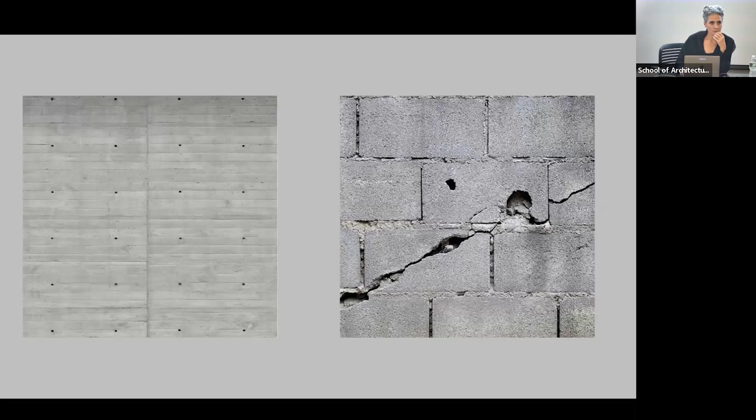Before I go into projects of our own at KPF, I want to bring in this discovery we made maybe two years ago on a trip to Japan. This is the work of Hiroshi Sugimoto—the Enoura Observatory, an absolutely gorgeous place on a cliff facing the water. It's a whole series of interventions within the landscape, some gallery spaces, some artifacts that seem to really toggle between the very abstract, elemental, universal, and the very culturally specific elements that he has positioned there in the landscape and in some of the semi-enclosed spaces.

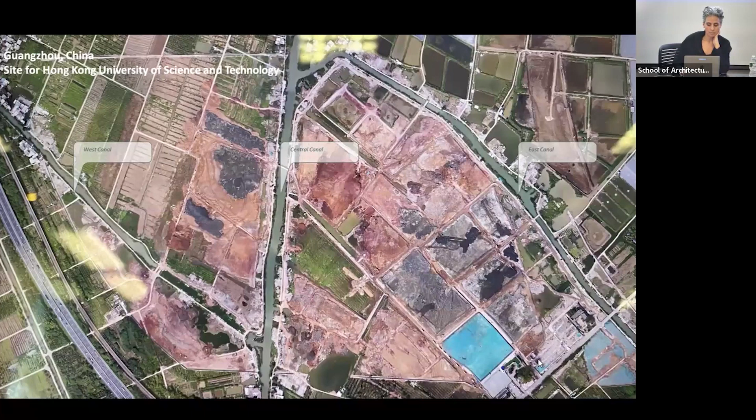So this is a project in Guangzhou, China for Hong Kong University of Science and Technology. This is how the site was prior to our master plan and our work there - mostly agricultural, with a canal that traverses through it. There was quite a rational master plan developed by my partners at KPF. I wasn't super involved in the master plan itself, but then in buildings within that.

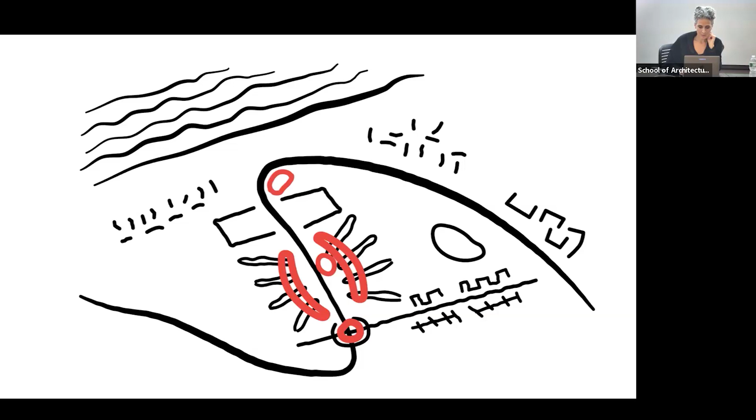The master plan had to do with, say, the machine in the park - a very rational organization of these lab buildings that sit within a campus, creating a whole campus. There's a residential component, a series of buildings on this side, and on the opposite side the canal going through it, with a few key buildings that anchor the beginning and end of this campus. This campus was designed, master planned, and built over 3.5, 4 years, which is absolutely insane.

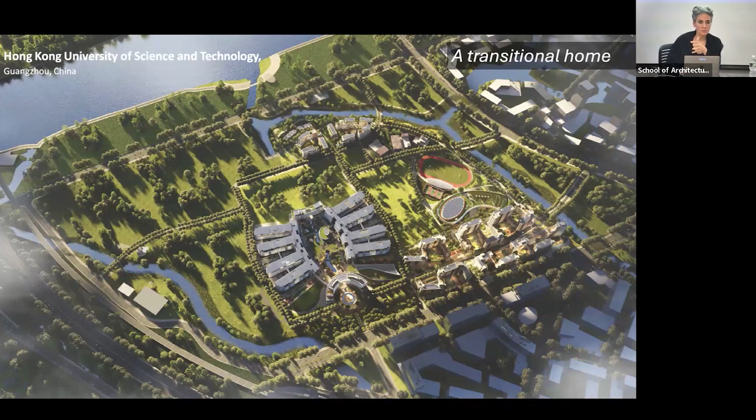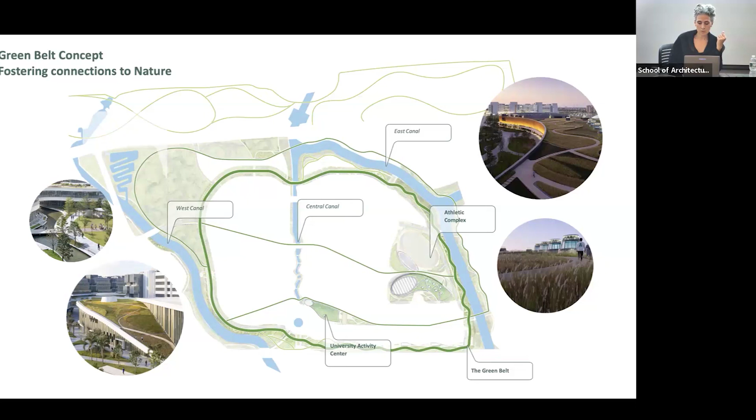It happened through COVID. I will talk only about 2 of those buildings that I had a hand in. As a counterpart to the more rational planning of the lab buildings, there was this idea of a green belt - connecting to nature, almost like an antidote to being in the lab and focusing in a rational, intense way for hours and hours. So there are a couple of buildings that are the activity center, developed as a landscape building of sorts, and the athletic complex - they connect through, and I'll talk about those mostly, as well as this administration building, which is the gateway central piece that you arrive through.

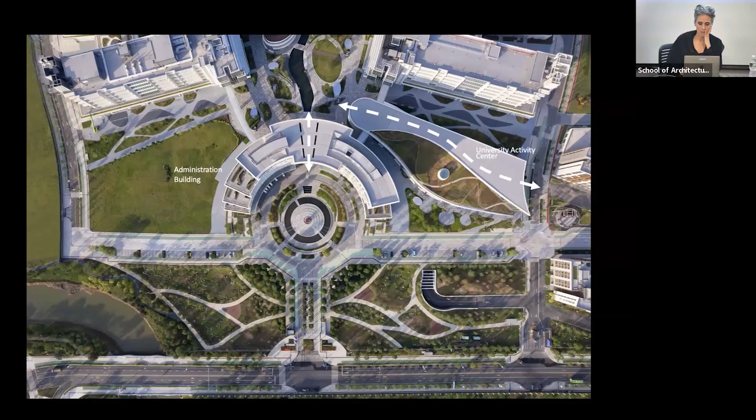Their new campus in mainland China was supposed to connect back to the original campus, keeping the symbolism, this arrival plaza, making sure the identity of the campus was translated, not replicated. In other words, what they were trying to do in China was create a campus that felt more open, more dynamic, more porous, and that translated into their pedagogy of teaching and the way they structured the curriculum as well.

Our way of thinking about it was exactly that: we'll keep this semicircular notion, but create a very dynamic form that is asymmetric, and through this giant gateway create a lot of porosity inside and out, as well as how it relates back to the rest of the campus.

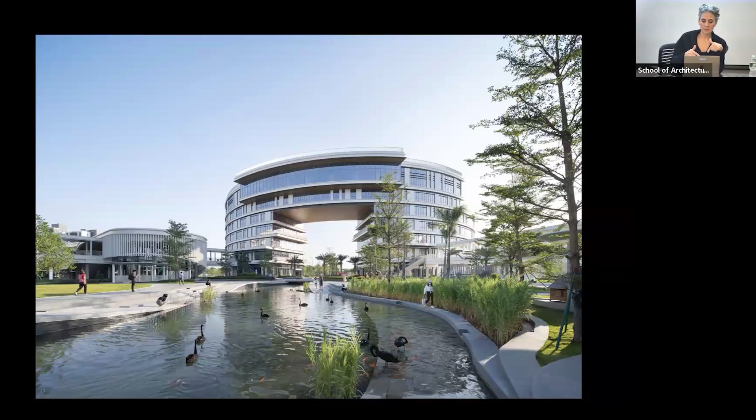There you see the integration of nature through it, that canal that comes through, and the notion of both coherence but also the campus itself being a series of almost meandering spaces of, you might say, fascination, where you find yourself through this constructed nature, constructed series of buildings, that avoid any kind of axial, completely open vistas through. So it kind of toggles between this coherence and fascination, in a way that unfolds as you go through the campus.

A series of green spaces and terraces cut through. And then one element that is part of a narrative that we really latched onto was the bamboo shoot, because the symbolism behind bamboo is that it speaks of growth and progress as a narrative and as a symbol in most of the region, in various countries of the region, relating to the bamboo shoot in that way. This was meant to be a place that drew from countries all around, including various parts of China, in terms of its student body.

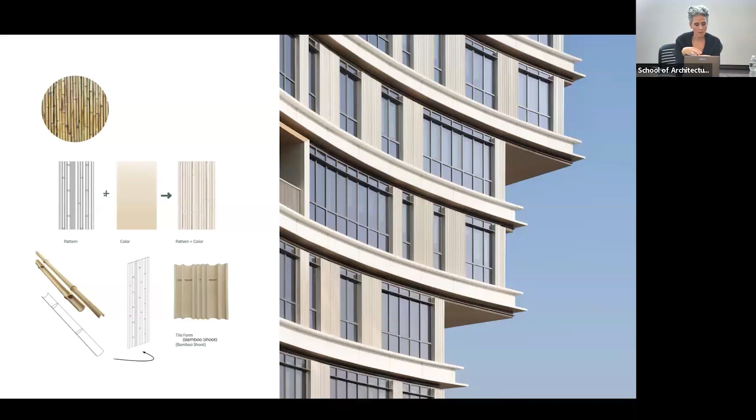Here's how we tried to look at the texture and the fluting of the bamboo shoot and create this patterning in the facade.

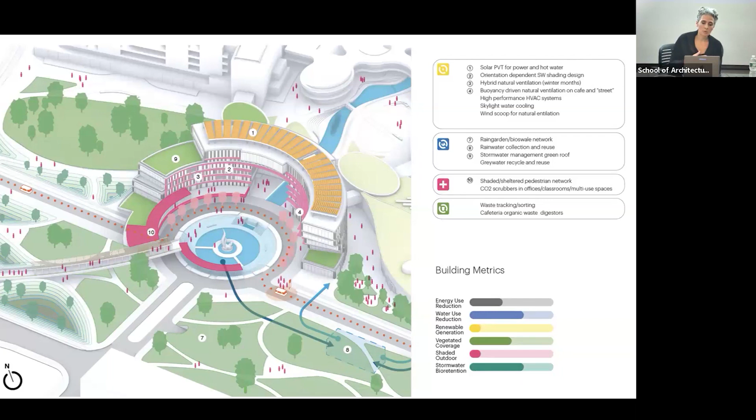And then in terms of what it does from a sustainability point of view, we're able to tap into what is called the living lab here for the whole campus, where all the buildings are connected to a circuit where their performance can be measured in real time. There is campus brain, a space where all that information is collected. So whether it's renewables, hybrid ventilation, or water management, this is that whole living lab concept.

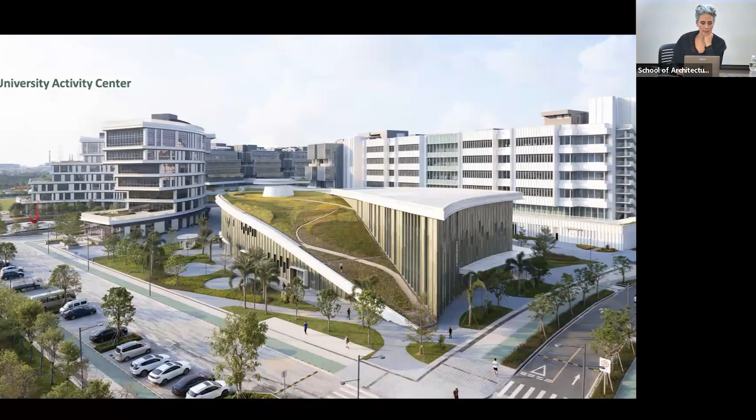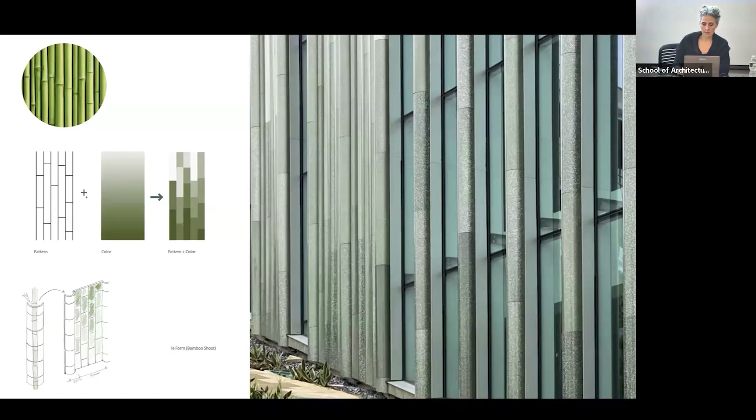And then the second building is the Student Center, a very landscape-oriented building that sits right behind it. Again here, it's a landscape building, and the facade borrows from this texture of the bamboo shoot, creating something quite unique on the campus, perhaps a little less formal than some of the other buildings.

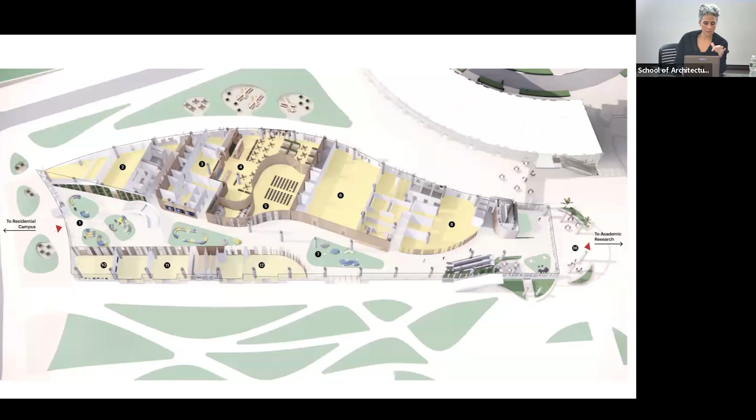In terms of its planning, it pulls people through, creating this interior street that is very much about this notion of fascination and discovery throughout. It connects the residential areas with the campus research areas on the opposite end, in this kind of meandering path on two levels.

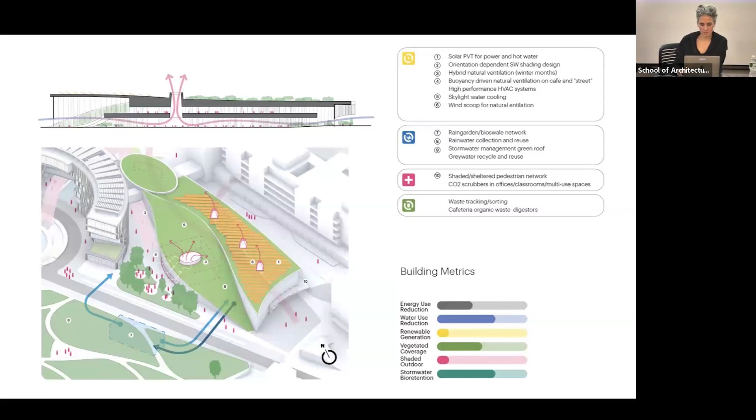This is just as the building is starting to get inhabited, so we don't have many images of it fully furnished. And again, in terms of its renewables and hybrid ventilation, it's something we really worked very hard to execute, and hopefully it'll bear fruit.

Jumping to very, very different contexts: the idea of belonging in HKUST in the project I showed earlier is more about belonging, but in a time-constrained manner. As students come through, they're there for 4 or 5 years. The place and the memories of the place that hold them together are very important to them. Everybody went to college, you're still here. You're going to remember Cooper decades from now, and you're going to remember certain spaces and moments within it as being like landmarks in your development. So that's very important for a campus.

I think understanding that the student body is passing through, and that they have this moment in their life where they come together, and their memories and relationships are intrinsically embedded with the place where they occurred.

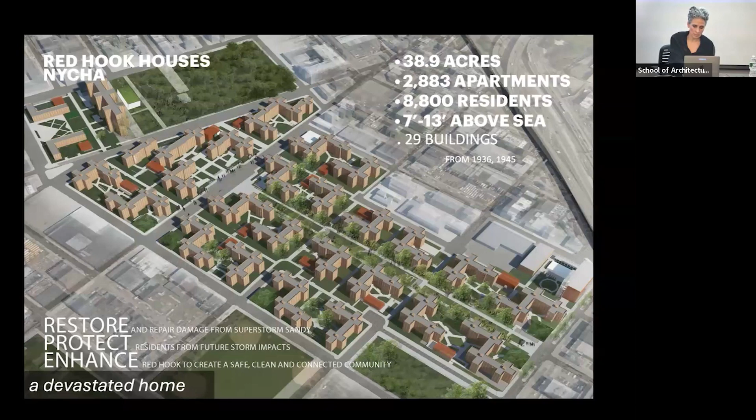In a very different context, but again 29 buildings - funnily the same number of buildings, but in a very different context. Red Hook Houses is a NYCHA project in Brooklyn, in Red Hook, and was a FEMA-funded project that came to us post-Sandy, a project to restore, protect, and enhance this whole development that was completely devastated. I'm going to share a couple-minute video that tells a good story about it.

Hopefully the audio is working.

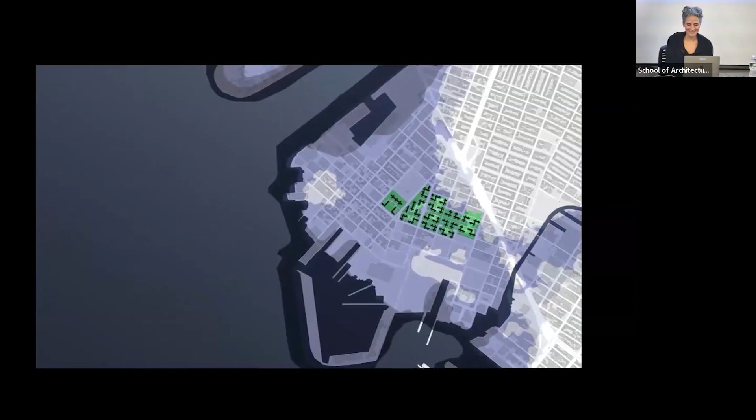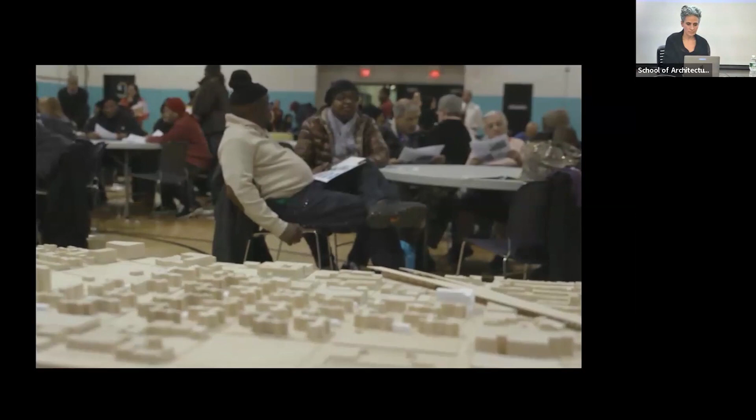A designer joined us, so I think the next chapter - we actually requested when we started the project that we got to speak to the residents. That's a direct relationship between the architect and the people living there, bringing out their trust and forming a solution that's really going to be the best. First, speaking to them, there were barriers. We came to them with what we thought were concepts and ideas that would be welcome. However, their main complaints had almost nothing to do with what we had identified as the main issues to solve.

One of the things we discovered during the engagement process was, yes, we'd been seeing issues on the site on an everyday basis. It's really hard, hit by the storm - and hard hit by the legacy of public housing and what it takes to maintain it, the level of investment and also the level of neglect. You're not just talking about floodwater, you're not just talking about power - we understood better which areas were dangerous, and why. Sometimes it's something as simple as not enough lighting.

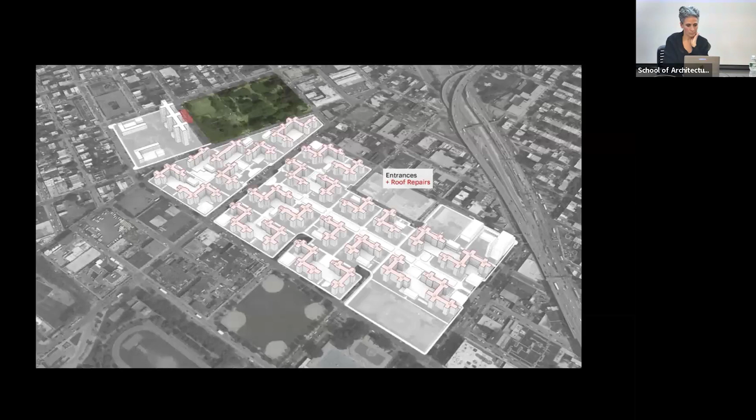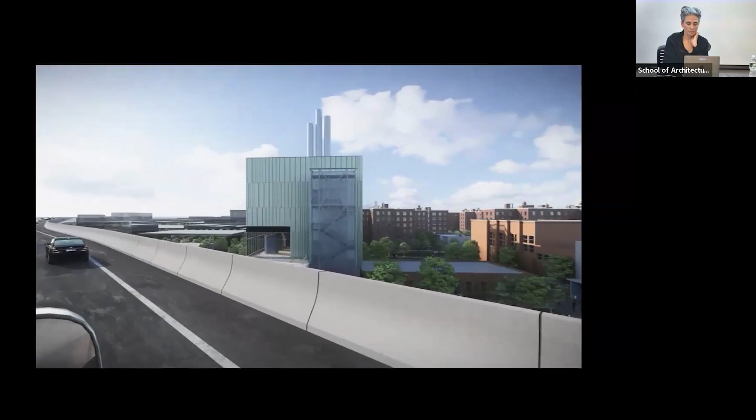The materials are very transparent, so they expose the site. There's an idea about visibility, understanding. The west side faces Common Park - you can see it has a large scale, and participate in creating, so the residents can take ownership of the changes.

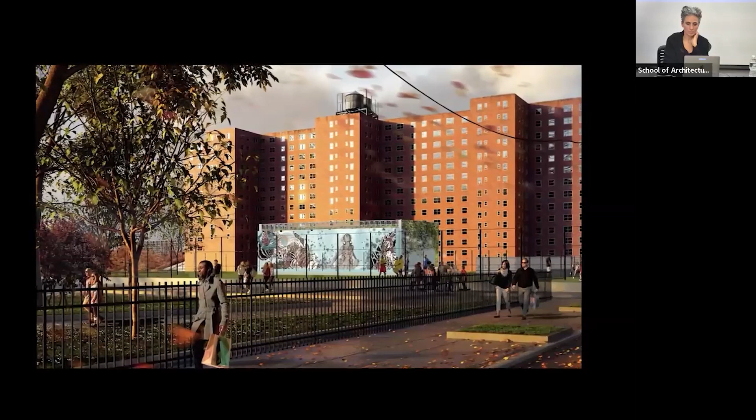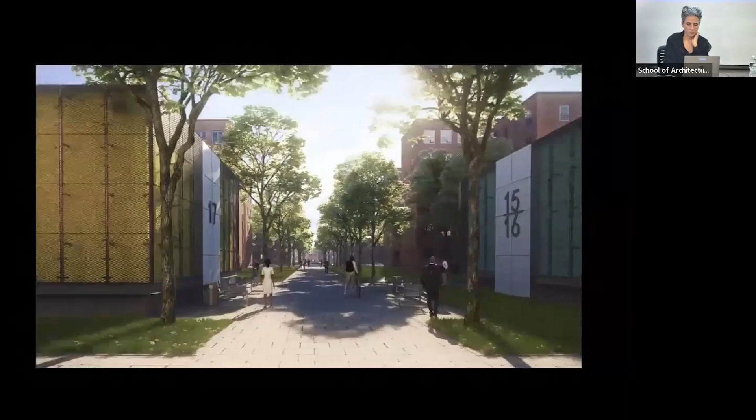Then it comes to facilities, the distribution of them across the site, located between buildings, adjacent to the buildings. All of these facilities will be protected, will be raised, will be provided the elevation they need to accommodate sea level rise.

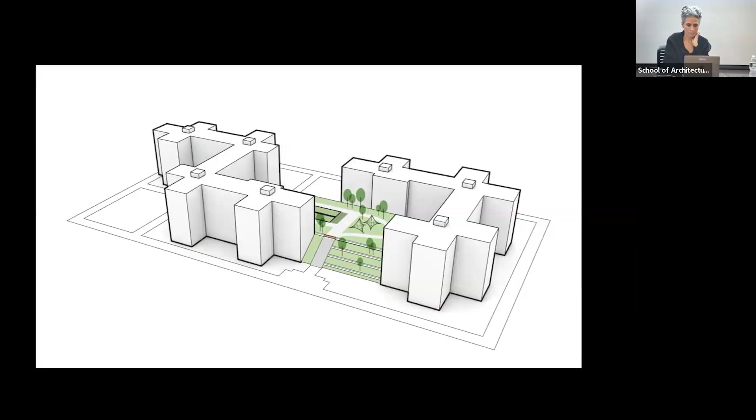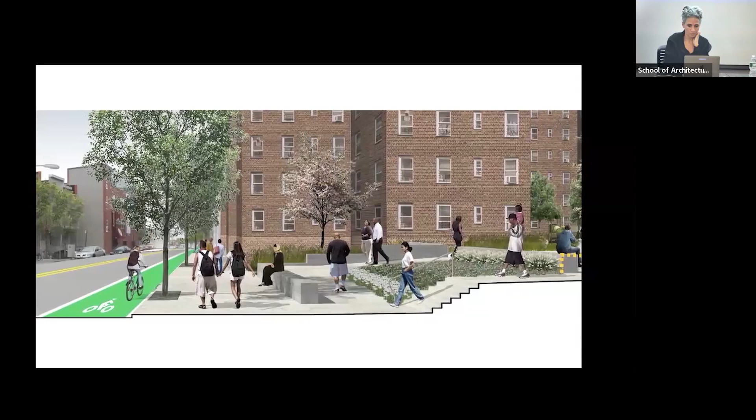If the neighborhood floods and water comes through, these lily pads will provide a safe haven for residents between the central buildings. We worked on this part, making sure the elevations of the lily pads can be seen from a police car, so that can be happening. At the same time, you stay within three minutes of safety, step on the safe roads. As people start seeing the changes, they're going to want more, and see that things can happen.

So this project is still in construction, but they just unveiled the mural a couple of weeks ago, maybe a month and a half ago. This mural was designed and created with the community, with various age groups, from the youngest to the most elderly, and it represents a lot of stories and specific narratives embedded in it, having to do with particular characters, particular members of this community represented in the mural. I think it's achieved a lot of what we wanted, and most importantly, it's also raised awareness of the reason for this project.

There's been a lot of understanding of climate change, of why this construction, which is going on for many years around the buildings, is happening. I'll go to a few details here that perhaps go back to the initial questions of spaces that one can relate to and environments that one can relate to as an individual, and that don't seem to be where the sense of belonging happens, where they are not impervious to you. In other words, you don't come through them and leave them without leaving a mark of some sort. So here, just something as simple as this color, this paint, as you orient yourself around it, it changes in tonality. So it's always kind of addressing you or responding to you as a person moving around the space.

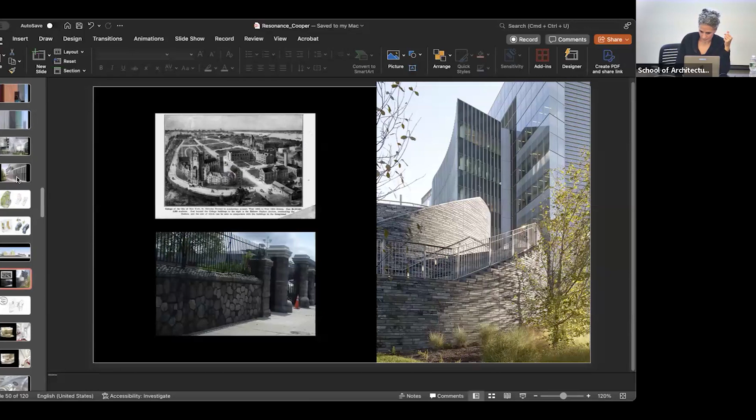So this is a project for CUNY. It's the Advanced Science Research Center up in Harlem, and it's comprised of two buildings that create that space in between them. They are paired under that elevated plaza, so it's really just one center.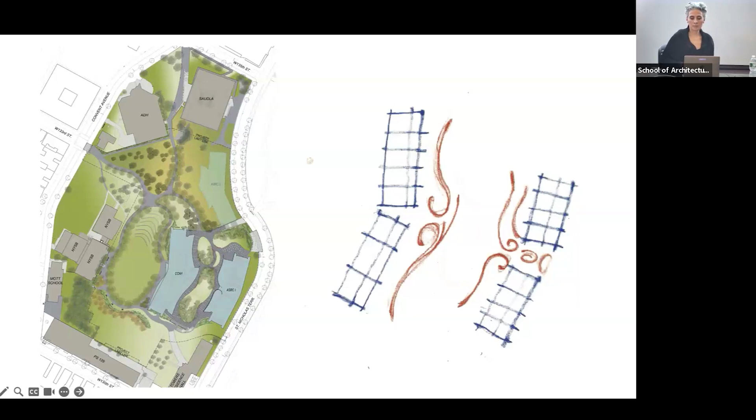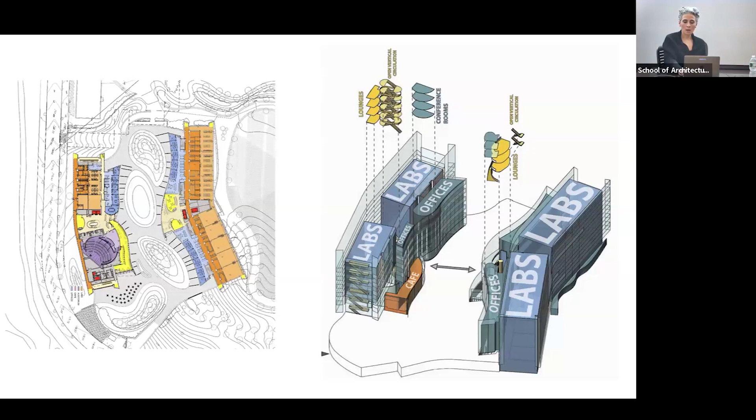Here again, the toggle between the rational, the coherent, and the experience more akin to fascination or discovery happens very clearly in the plan and the partie. These spaces depicted in red are the social glue spaces, where you might have haphazard interaction between people going and coming from their labs or different departments. It's meant to be a place where you're not only going to work and leaving, or doing your lab experiment and leaving, but this becomes a place that you identify as your community, your extended community of scientific community in this case.

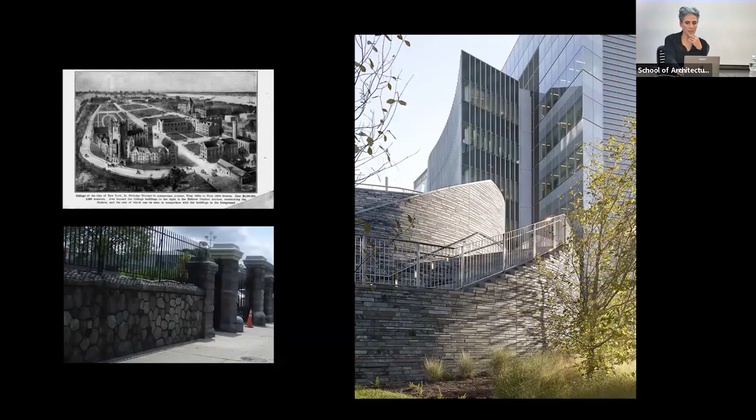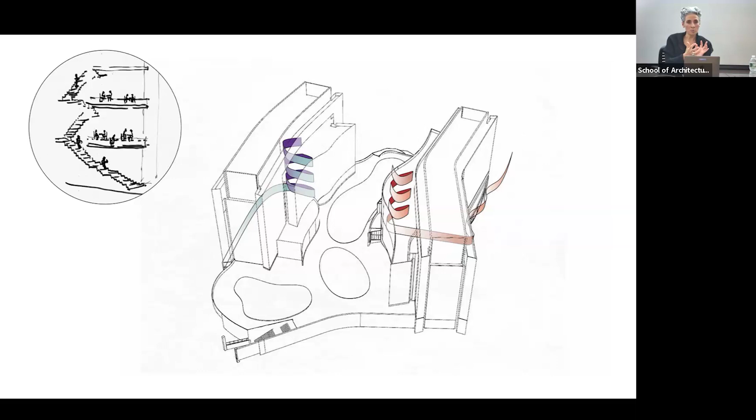There are material associations that have to do with the history of the site. This used to be a convent, surrounded by a wall of schist stone, Manhattan schist, which can no longer be excavated or used, but this came as a result of excavation from the subways in New York City. We created a base to the building that recalled that material, the tonality of the schist, and that roots the project before it lifts itself into the glass components. At the center of both buildings are these social spaces, almost like ribbons of interaction, where whenever you put a stair next to a lounge, as people come and go, they run into each other, and a sense of community can be built and expanded on.

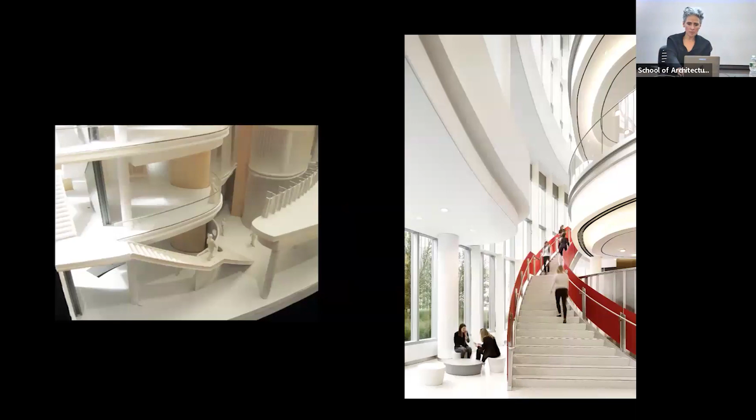So these are some of the spaces and models we're talking about. Again, the introduction of this element of color that is not indifferent to you as a person moving through it, but always references you back because it shifts as you move through it. These spaces avoid the linearity and the axial, very coherent view from the beginning of the building to the end, but sort of ask you to meander through them.

I'm going to skip through some of these in the interest of time, and go to something very different, because this is an adaptive reuse project. This was very much coming from our client here, which is the Meta offices, at the Farley Post Office. One of the main missions here was to create spaces where the employees felt at home. This is really the definition of workplace as home.

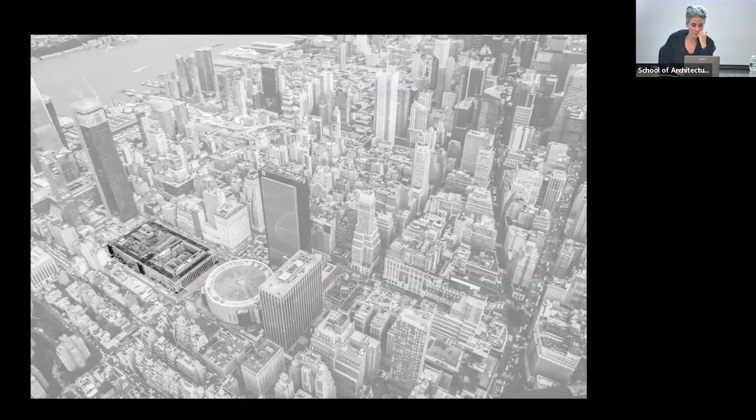There are many challenges and many advantages. This project is giant, it's 800 feet by 400, basically two city blocks at least, and it's quite a unique building. This building was restored by SOM, including a portion of it, which is the Moynihan train station, and all the other space was what we worked on for Meta, for the offices of Meta. It's a landmark building, it's a historic building.

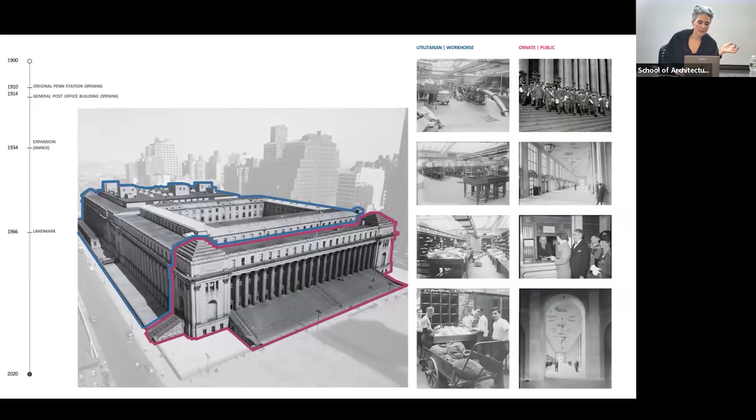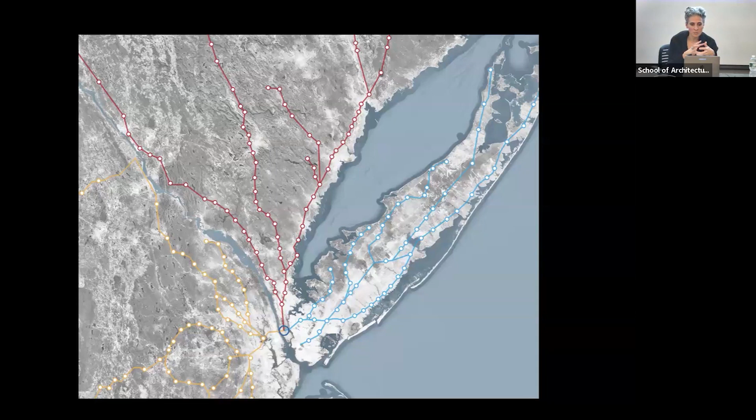It has a front of house and kind of a workhorse part of the building, which is the mail sorting facility. It was very interesting for us, the narrative of this place as the epicenter of information and communication, and transforming that in a more digital age into the office that would be Meta's office place here. As we started to research the project, we came across these images of the sorting facility and the pneumatic tube, which actually existed, incredible to think of as this network that cut through and connected Manhattan.

And really as a piece of architecture in the middle part of Manhattan, you're not looking at a skyline, you're not looking at a streetscape, but you're really entrenched in this working zone, the trunk of other buildings. And the vistas, because of the footprint of the floor plate, are quite large, so you're looking through almost a screen of windows onto Manhattan around you, Midtown.

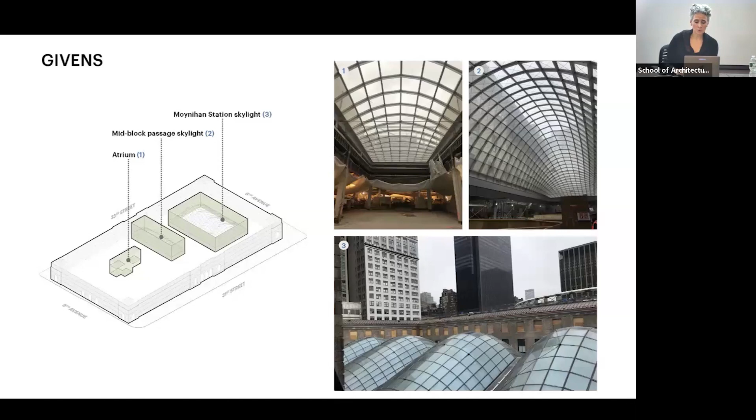Some of the givens of the building were these giant atria that brought light into it, but then this other atrium in the center was one that was very important to make that floor plate viable as an office. And there were some elements in the building that were historic elements that we needed to preserve, landmarked.

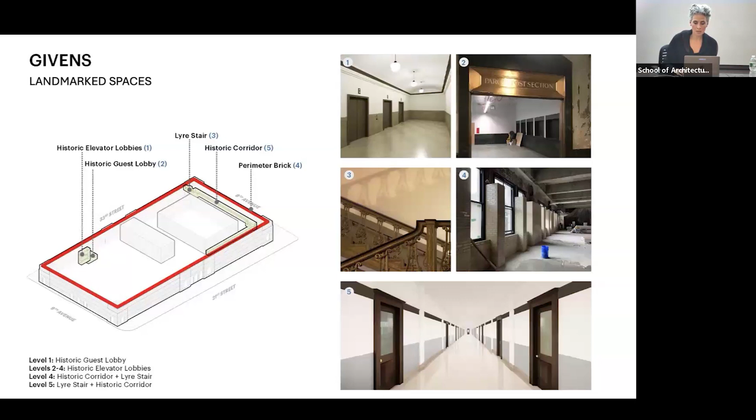Some very surprising ones, some not so. A lot of texture, a lot of beautiful materiality in some parts of the building. And our mission was really to just, yes, create efficient floor plates for office, etc., but really create a relief from this grid, create areas where people can come together, leave their desks, communicate, socialize, feel at home.

And so we started to organize this. Remember that this is almost like city planning within an interior because it's 800 feet by 400 feet, it's giant. But these neighborhoods that ring the perimeter, transitional spaces and social spaces that bring it all together.

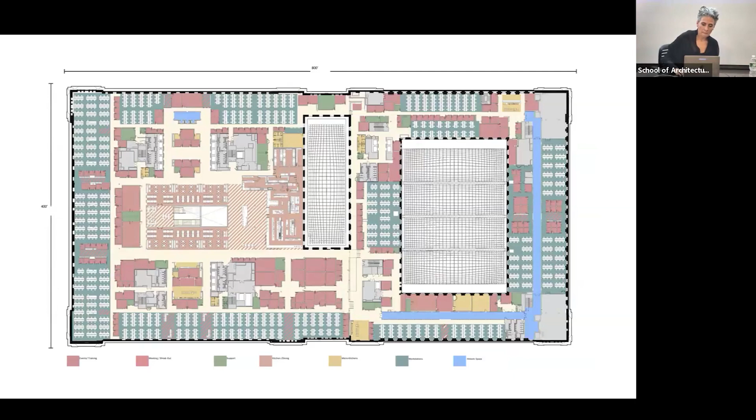And one of the first moves was this atrium that would connect to the arrival place, the place of arrival, which is really like where the main lobby is and where you begin your journey up through the building. And the design exercise almost became an exercise in organization and organization of wayfinding and organization of identity of each floor plate.

And so what we picked up on were certain elements on each floor that were quite unique. Like the top floor had access to this terrace. The fourth floor had this historic corridor and historic elevator lobbies in it. The third floor had an art wall or potential for an art wall that was very present. The second floor was this connection between the two atria, and then the ground floor was the beginning of the journeys.

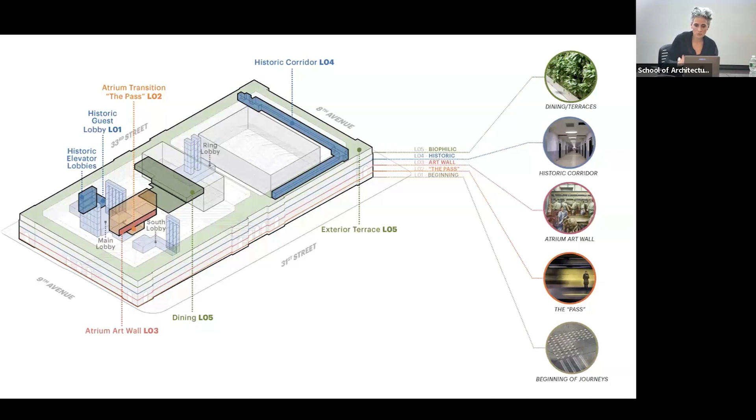And so all the materiality, all the selection of materials and patterns and choices that we made, design choices we made, fed right back into this system of thinking, including sectionally, but then in plan, the organization of each part of the plan as it relates to brick patterning that we would apply to different parts of the building.

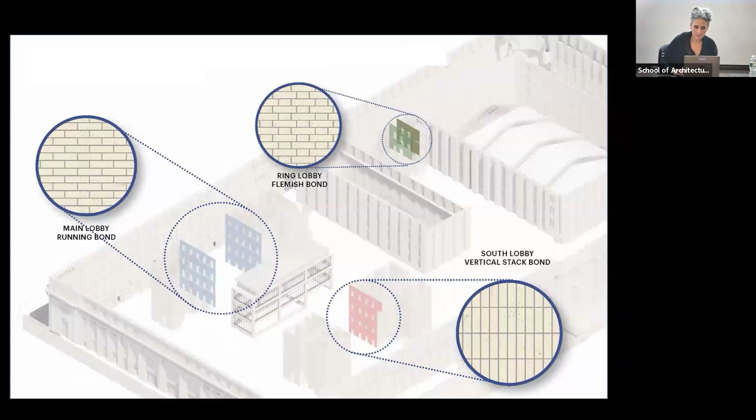So as we developed this way of thinking through it, when you think about wayfinding, it sounds very banal, but it's actually quite important and can be the source of stress for many people that try to find their way through it, and a source of alienation, actually, whether it's in a city or an interior of a space. You feel a lot more empowered when you know where you're going and where you've been, right? You have a mental image of it.

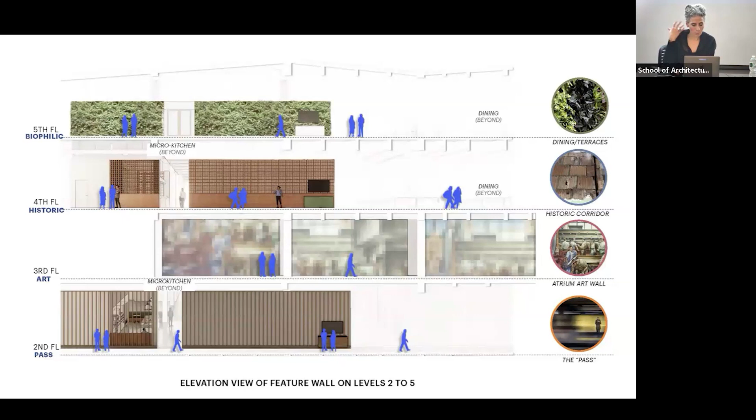And so each part of the space had a certain character. I'll just talk about this one here. This is one of these historic spaces in the building where we had to maintain the appearance of the surfaces around us of the elevator lobby. We didn't quite know why, but yes, it's historic, but nothing really quite special about it. But we did it. However, we could transform the function of it.

So we created these very intimate niches, almost in a library setting, where you could go, you could modify the light fixture a little bit, you could adjust the cushions a little bit, like enough of adjustment of a space that you feel that this is yours and you could be there for however much long you want. These spaces are fully booked all the time, and apparently highly sought after. But it tells you something, because I think that people want to be there, be within their community, but they also need a space that they can call their own, even if it's for 45 minutes or half an hour of me time.

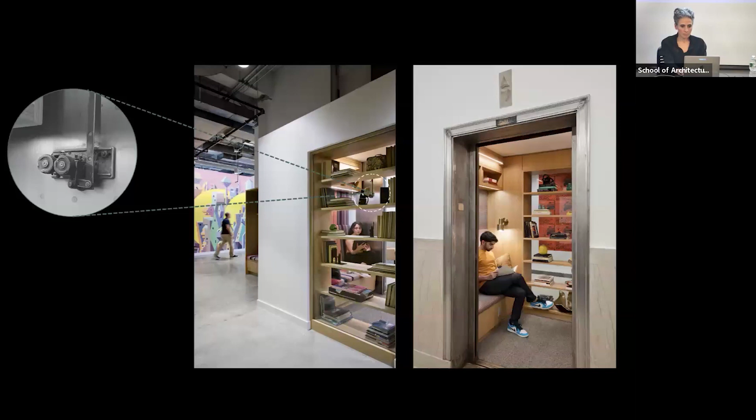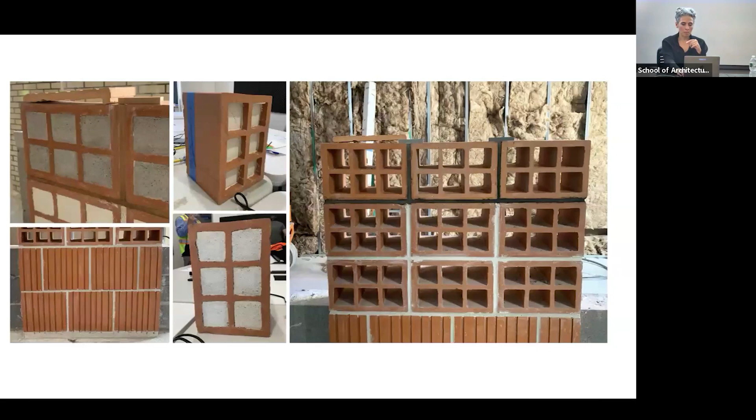And then the rawness of these materials that we chose, very simple materials, very subtle patterning in the ground. But they have a narrative that's associated with them, but it's a veiled narrative, right? We talked about all the patterning that we found in the buildings or the mailboxes, and these sort of translate through, but not in a way that is very over the top, in a very subtle way.

And these are some of the atrium spaces that connect across. Again, the presence of art is not something that a group within Meta curates and selects. However, we identify certain spaces that we felt would be interesting to house these.

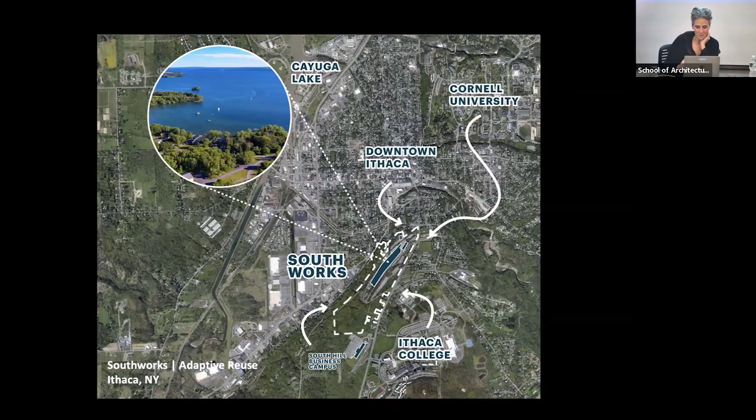And then finally, I'll talk about Southworks a little bit. My students are dealing with this site, and they haven't really seen our response to it, so I'll show it briefly. It's also an adaptive reuse project, quite large. It's an industrial complex that has been shut up, closed up, since 2009.

It has a long history, built piecemeal over time. In 1928, it was really housing the Morse Chain Company, which created, invented, and produced chain drives that help operate gears, etc. It was really instrumental, and they also used to manufacture parts for planes in this place.

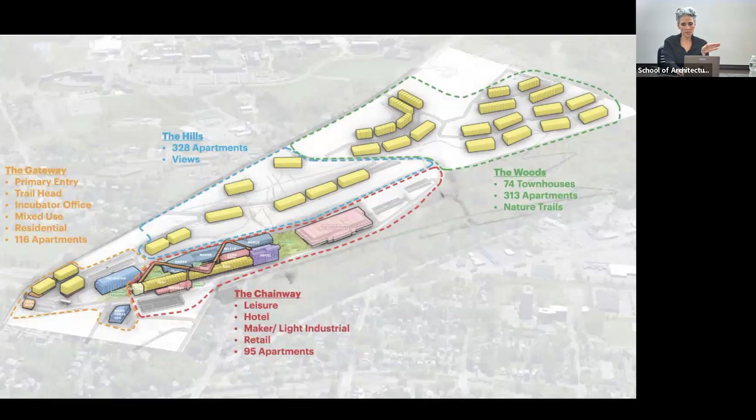So we developed a master plan for the whole site that had to do with mixed use development within that central zone you see multicolored, but most of it in yellow is affordable and mixed income housing.

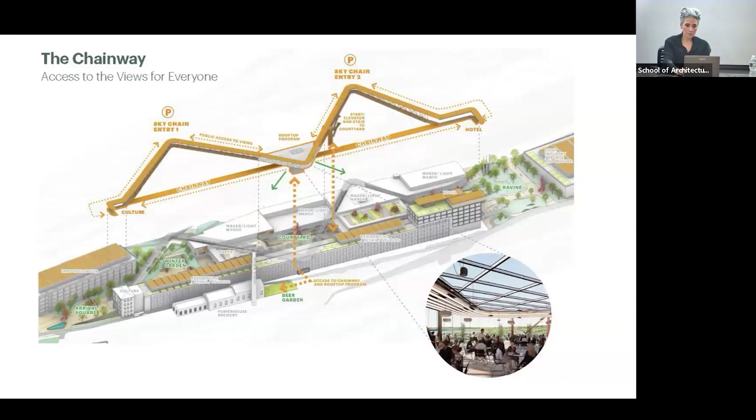And the main move that we did was the introduction of this sky chain connection. What that does is, it's a very topographic site, and once you're within that site, you have no access to the views beyond, which go down the valley and up to a beautiful lake, Lake Cayuga.

So what this chainway does is bring in the public and allow access. It's kind of a connective bridge, allowing access to these views beyond and access to the site for the general public. So you don't have to own an apartment here, you don't have to rent space here, and you can still have access to the site and to the views beyond.

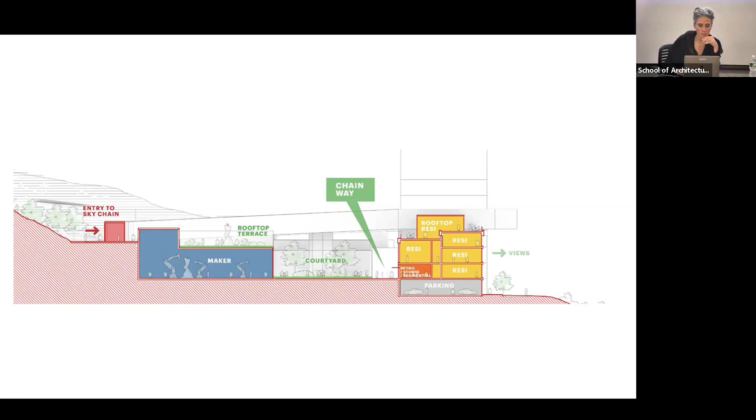That was the main move we made, in addition to the adaptive reuse of different spaces - maker spaces, residences, cultural spaces, retail, food hall, etc. - that bring this back to the city as a vibrant yet meaningful place, because light manufacturing has a big need, and there are very few places we would build now that could accommodate that.

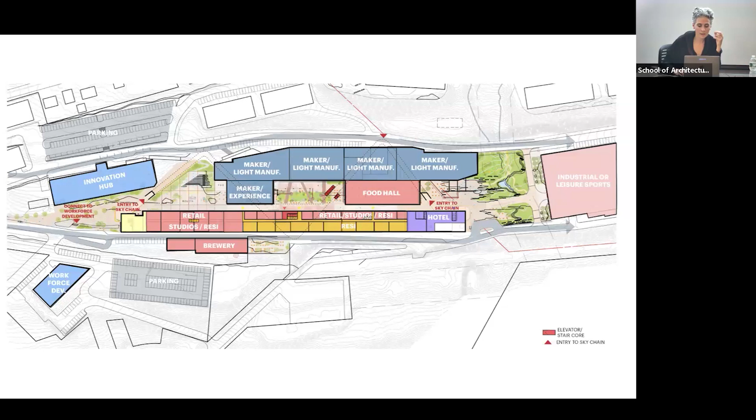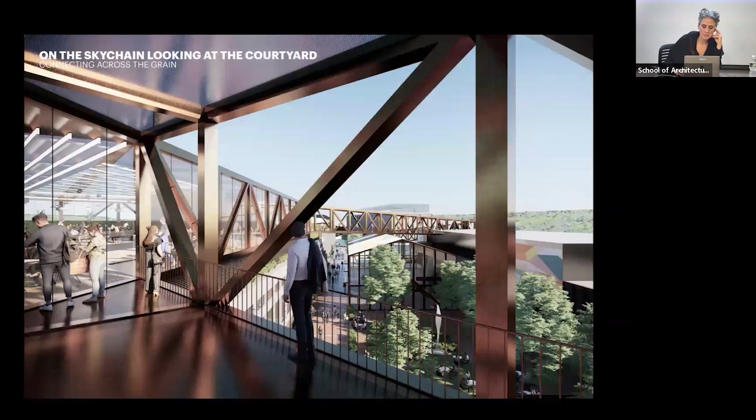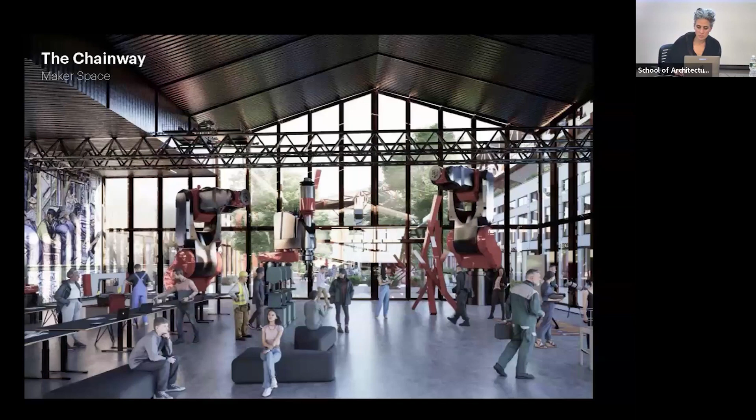So this has been developed as a master plan. It's not happening immediately, but hopefully in the near future bits and pieces of the site are starting to be developed - first the residential, because there's a huge need for affordable housing in Ithaca, and so that's what's been rolled out first.

And then I want to go back to this question, and I'll share a piece that is an art piece at Art OMI that was commissioned about two years ago, still there, going back to this question of color and interpretation and narrative, and seeing whether it all could start to tie together.

And it generated a series of prints, or exercises, in color, thinking about what blue is, what sky is, and what that means.